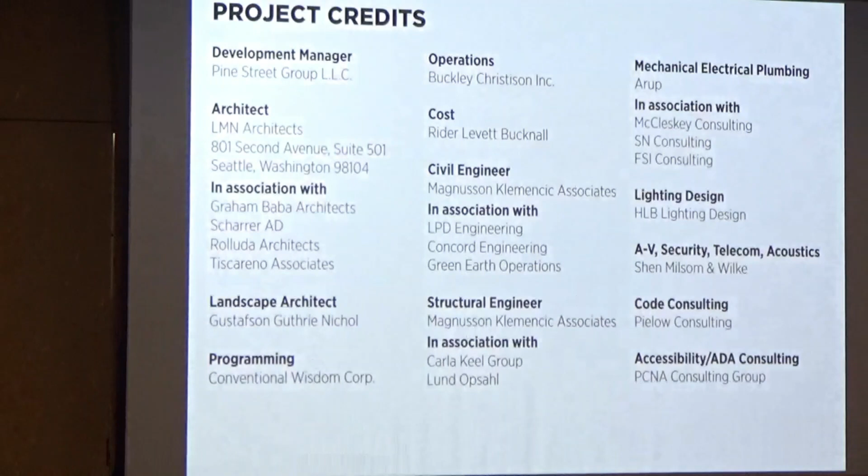So I'm here speaking on behalf of thousands of people and the work that everybody has done. I'm going to just page through without reading every name, but just to remind you that there are so many other really important contributors to the project as we went through this.

One of the things that's been especially exciting about this project is that it has a very ambitious art program. The Convention Center has always had an ambitious art program and an art collection. Part of this project was to establish an art program, and it was funded from various sources.

It was in the range of $8 to $9 million worth of artwork. We engaged approximately 25 different artists. There was a very specific ambition to reach out and engage artists from communities who haven't traditionally been part of this art program. Many of them are young and emerging artists, and more than half of them are women. It's a really diverse, inclusive collection of artists, and the artwork throughout the project, all in public places where people can experience it from the street or from public areas, is still emerging. It's not all installed yet—some of it's there, some of it's in process. But I think the art program itself has been a really exciting part of the project.

The other thing about this project is it's big, it's expansive in its expectations, so we framed our approach like this: this has to be thought of as more, it's not just a building. In fact, we decided it's one of these things. And what that means is it's a holistically integrated, equitable, economic, ecological, civic, urban organism. Every one of those words has an agenda—it has an impact on the way we think about designing and the expectation for what we'll accomplish by making this project with that kind of philosophy.

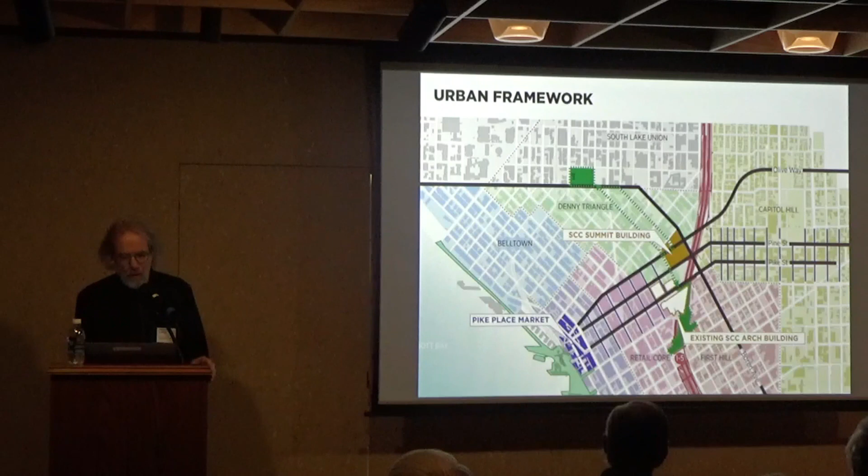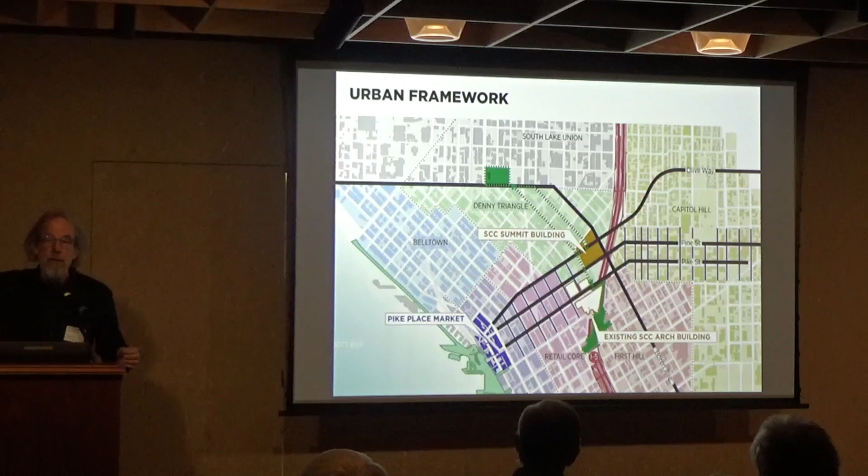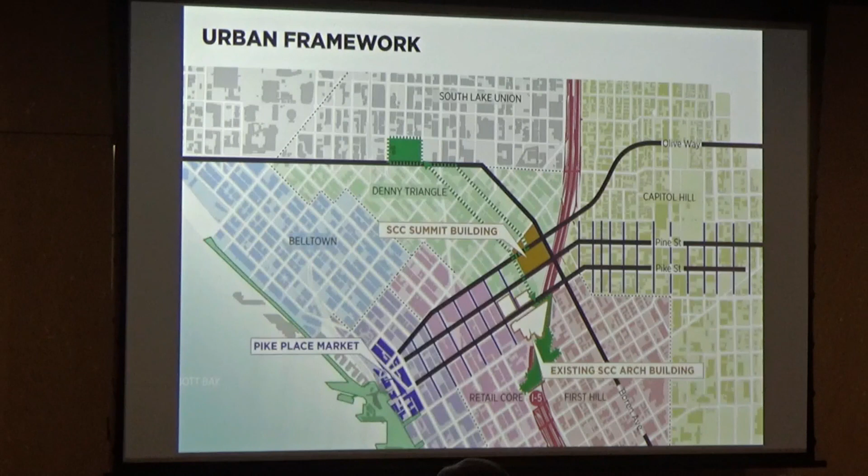It's positioned right in this really interesting place in our city's urban framework—kind of right on the edge between First Hill, Capitol Hill, and all the neighborhoods right in the heart of downtown. Many of them are the fastest growing, most rapidly evolving neighborhoods in the city. This project aspired to being a place that reconnects disconnected conditions in our city. It had historically been an open bus staging site, which was no longer needed when light rail went through the tunnel. Part of this building actually cantilevers over the freeway in order to connect the pedestrian experience on Pine Street, so it's knitting together a lot of different pieces of the city in the heart of the urban plan.

Another part of this project is all of this pink stuff that is not on the same footprint as the building. The project funded about $93 million worth of community benefits, and most of them are off the footprint. Some are on-site open spaces and artwork, but a lot of it reaches out into the community—street improvements, public artwork, affordable housing, the study for the possibilities of a freeway lid, and a number of other things that were part of the project.

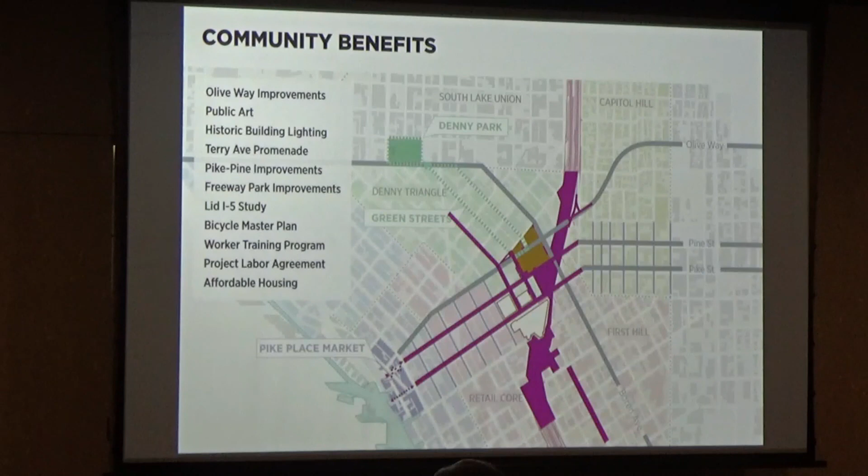So I'm going to show you a series of photos. It's interesting to look at this photo, which was before we started the project. Not only do we now have a convention center there, but we have a whole bunch of towers right there that didn't exist. So it has been built in the heart of a very rapidly changing place in our city.

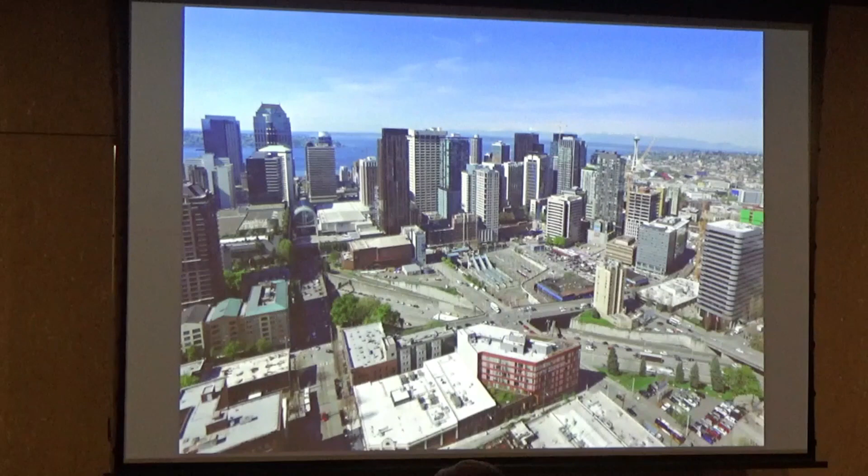But if we start at the lowest level—at the bottom is a very big 150,000 square foot exhibition hall, that's the blue shape you see at the lowest level. Adjacent to that, also underground, is a loading dock, with truck loading bays on the right-hand side, and on the left-hand side, the yellow is the lobby space that connects to that truck loading dock.

Sitting on top of that is the street grid of the city. So Olive Way, which goes all the way through, and Terry Avenue, which ends in Olive Way, are built on top of the loading dock, which is sitting underground.

Another interesting characteristic of this site is that in the foreground of that image is the intersection of Boren Avenue and Pine Street, and at the far corner is the intersection of Howell and 9th Avenue. The site slopes 50 feet between those two points—low at the far side, high up at the corner of Boren—which means the pedestrian sidewalks and the perimeter intersections meet the building floor plates at different levels. That made the puzzle extra complicated but really interesting, giving you a chance to engage the building in different ways around the perimeter.

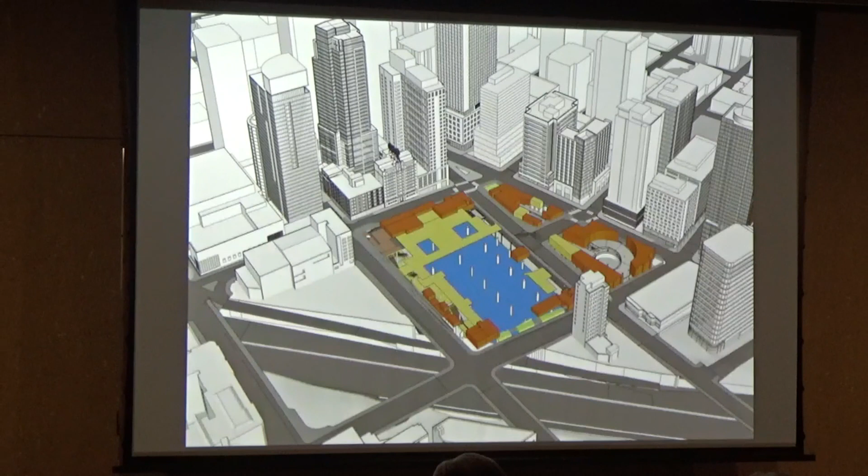At street level, everything you see in orange is retail or some kind of active street front function, like a lobby to some of the other buildings. One of the fundamental ambitions was to create a very active, engaging, vibrant street front condition for pedestrian edges all around the blocks. I'll show you more about that in a minute.

On top of that, or at the same level, is a public market, which is that big yellow shape you see. That's open to the public all the time, regardless of whether you have a ticket to a convention or not. The intention was to welcome people into that space.

During design, we called it the mixing zone - the idea that visitors who may be from out of town coming to a convention, or people who live here and want to be part of the vibe, go to the coffee shops or restaurants, and would all mix and share that experience.

From that space, even if you're not going to a convention, you can look into the atrium and look down into the exhibit hall, or up to the upper levels, and actually see what's going on in the events.

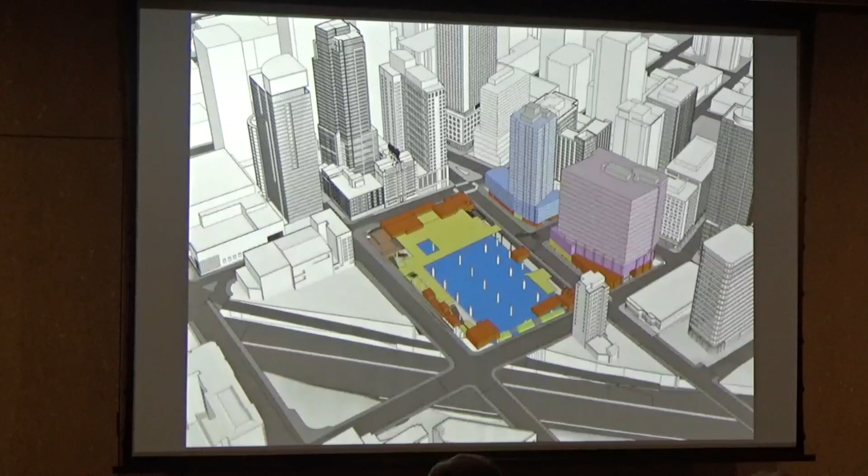Above that are all of these other rooms. So above that, the next blue box you see is called the Flex Hall. That's a 100,000 square foot room with no columns - a clear span room.

It runs all the way from Boren to 9th Avenue - it's two city blocks long. It has a big window at each end, so you look out at 9th Avenue toward the Camlin facade, and on the other side up into Capitol Hill. There are also windows on the other sides looking across to the Paramount or down into the Denny Triangle neighborhood.

The two purple levels are meeting rooms, and the red thing on top is a 58,000 square foot ballroom. 58,000 square feet is the size of a football field, including the end zones - so you could put all of that right inside there.

We're still trying to convince the convention center to let us have a flag football game in there where the design team and the contractors play against each other just for fun. I think we could be faster than they would, but I don't know if we have the same critical mass.

One of the other things you'll find in these purple boxes are shared meeting spaces. They're not all enclosed rooms. One of the things we know from designing convention centers and meeting spaces for people around the country is that people are really tired of going into windowless boxes and sitting in and watching a presentation. They would rather have windows, they would rather feel connected to the outside, to the city.

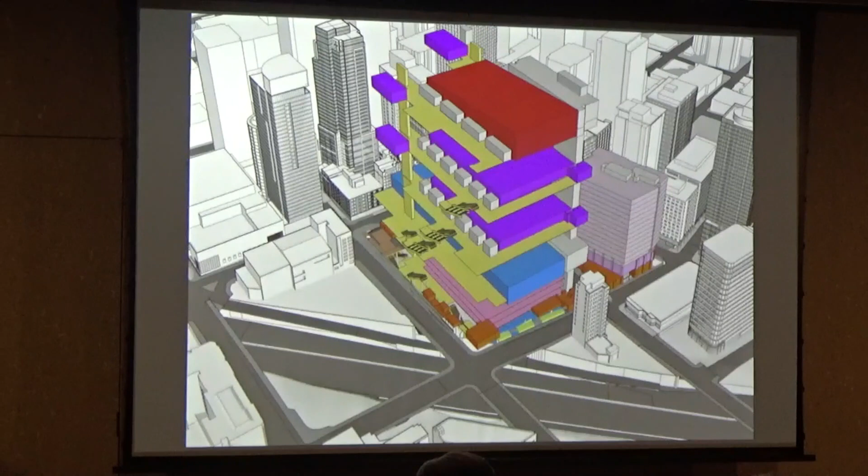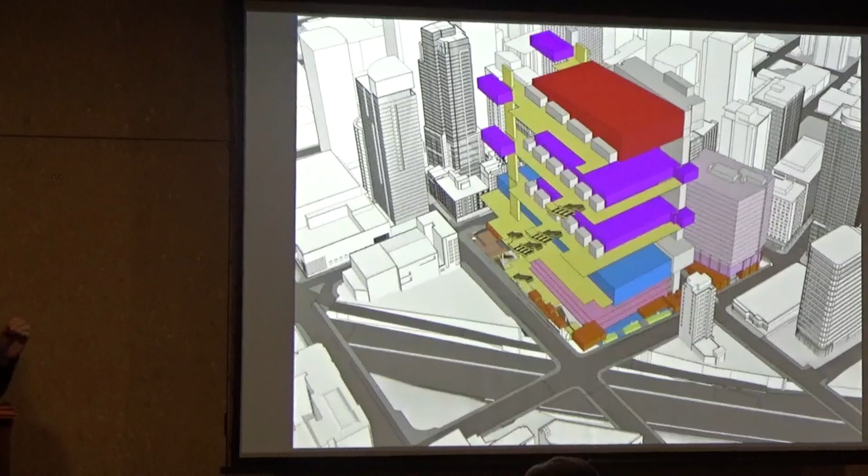In fact, we designed a convention center in Vancouver on the waterfront a few years ago. It has a combination of enclosed meeting rooms and sun spaces - lobbies that go around the edge with windows that look out into the city. They found that a lot of their clients would prefer to book their meetings in the lobby rather than in the meeting room, so they can look out the windows and be part of that experience.

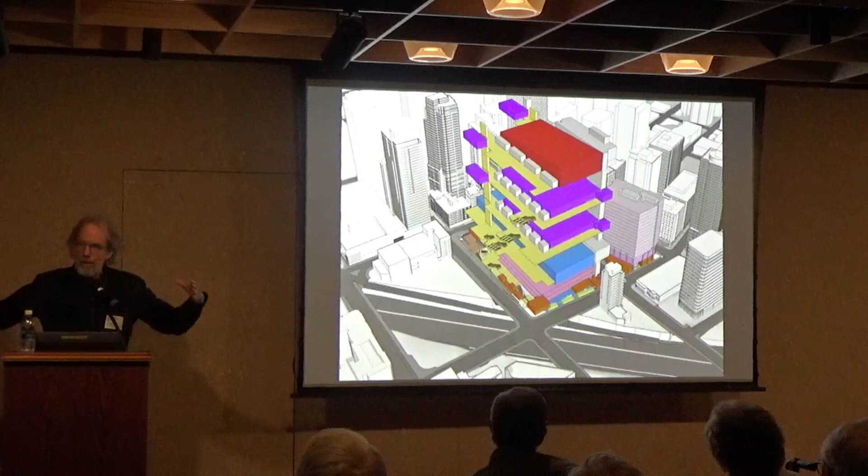So in this case, we actually made every event space, including every meeting room, have access to daylight. There are many meeting spaces that are simply glass enclosed spaces sitting outside the enclosure, adjacent to the lobby. And then if you pack it all together, that's the general building form of the project.

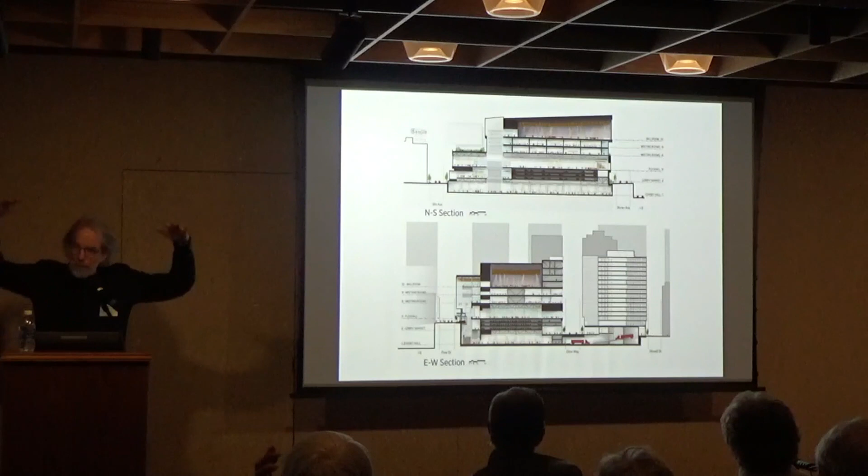In cross-section, you can see what happens when you stack all of that up. Looking at the lower cross-section, the lowest level is the exhibit hall - you see those three skinny floor plates. There's a parking garage built into the heart of the building; you can't see it anywhere from the exterior. But within the dimension of those three floor levels of the parking garage are big steel trusses creating the long span that goes over the exhibit hall below it.

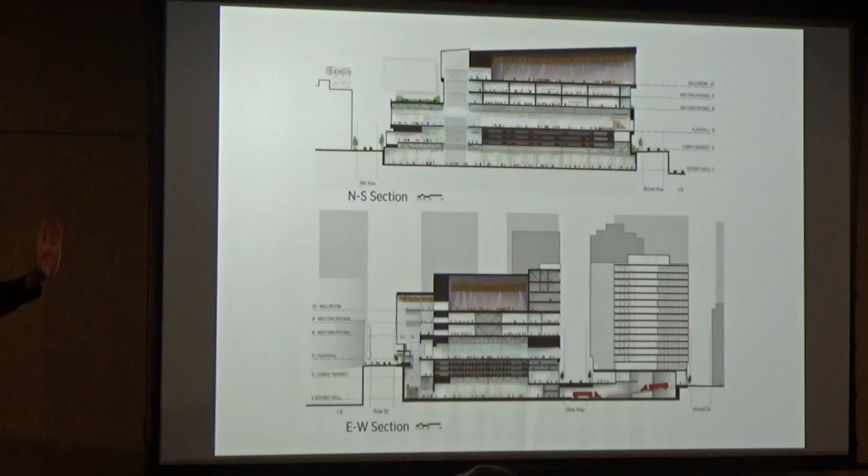On top of that is the Flex Hall with no columns, and on top of that are two stories of meeting rooms. Those also have really tall trusses that span across, which allows us to clear span the Flex Hall and create a really stiff floor in the ballroom.

One of the challenges in a ballroom is when you have a dance party and everybody's moving at the same rhythm, it will vibrate the building. So we have to have a really, really stiff floor. And then the roof, of course, is up high with a long span over the ballroom.

On the left side of that section, we'll come back to this in a minute, but you see how the building sticks out at the upper levels. One of the kind of strange things about this property, which I think is left over from when the I-5 corridor was created and they acquired property and adjusted property lines, is the property lines for this site on the Pine Street site actually go all the way out to the curb. So we were able to build our building over the sidewalk and still be within our property.

And so we did that, and we created that hill climb with the stepped floor that you can see from the facade, and you can be inside that space and look down toward the west, toward the market, toward Elliott Bay, and you're clear of all the other buildings because you're over the sidewalk, which makes an interesting space. And then the drawing above is all the same spaces, just looking at it from the other direction.

One of the things you see there on the far left is a roof terrace, and I'll describe that more in a minute. It's an interesting space at the level where you're at the cornice of the Camlin and the Paramount. So when you're on that terrace, you see all that terrific terracotta detailing at the upper part of the building that you don't really see so much from the sidewalk.

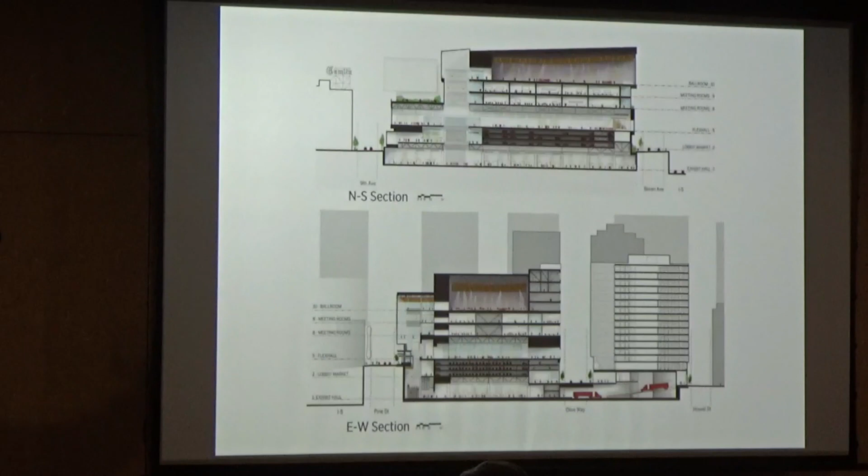Next to that, you can see another atrium. It goes from the top to the bottom. It's over 200 feet high. It brings daylight all the way through the building and connects all the different floor levels visually.

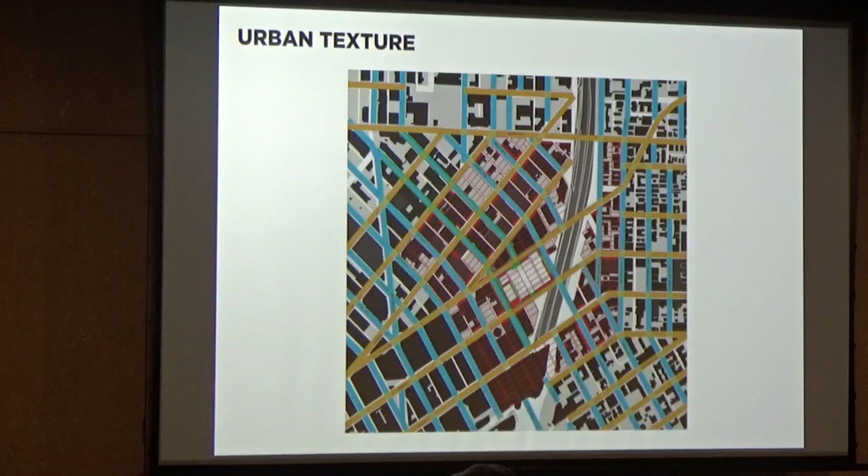What we wanted to test was how could we be a little bit of both. We know we're never going to be as small as one of those, but we wanted to find a way to engage that texture so that when we manipulated the forms of the building, we were aligning it with those modules in the planning, creating subparts to the building that are each at the scale that relates to the surrounding buildings and streets, on the same texture as the historic grid. So that's what all of those colors are, and this is one of the diagrams of the analysis in order to look at it in that format.

We also analyzed the arrangement of similar functions on the streetscapes in the surrounding neighborhood, both in the Denny Triangle and the downtown core, as well as Capitol Hill, to make sure that we were at least as dense, and in most cases more dense, with active street front than the neighborhood was, so that we're not downgrading the quality of the pedestrian experience. We're actually amplifying the high quality aspects of the pedestrian experience.

This building, when you have thousands and thousands of people, also requires a lot of emergency exiting. So woven into this and broken into subparts that are relatively small and easy to absorb in this texture are 240 feet of exit doors.

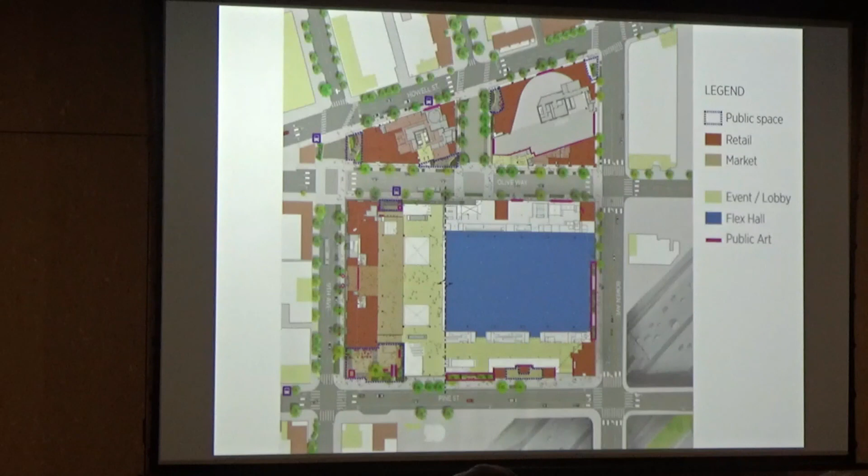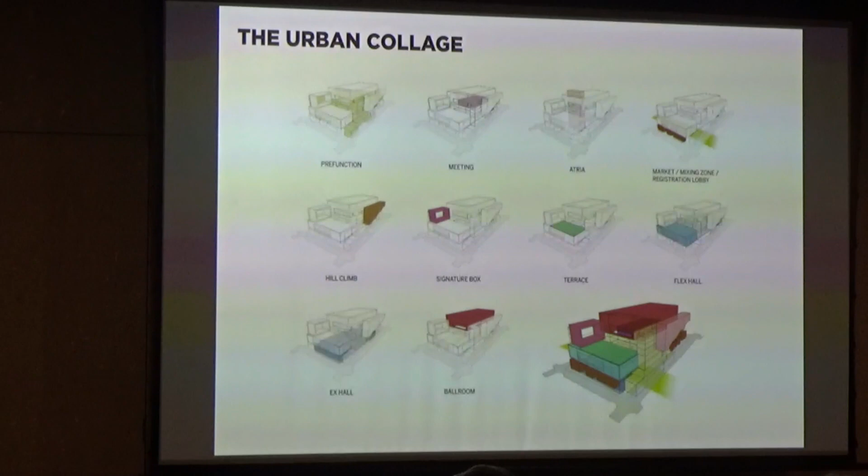The width of that roof garden facing the Paramount is exactly the same width as the Paramount. And the edge of that roof garden on its north edge aligns with the north edge of the Camlin. And so what we have on that roof garden is a space that is framed by the Paramount on one side, the Camlin on one side.

That special box, as we call it, the signature meeting room in the convention center, and then a view into the atrium of the convention center. So the convention center and the nearby buildings are forming an experience that's this kind of collage of what we control and what we're reacting to.

So where all these people are standing will be a series of big community picnic tables in long rows. There'll be smaller seating areas. But what you can see is the experience of being kind of up in the city.

Right across the street is the top part of the Camlin, and you see all of that really interesting detailing, the Camlin sign. This is looking back toward that meeting room. There are 2 stories of meeting rooms in that space. Underneath that meeting room is a covered terrace space, so you can be outside in the rain under that space as part of the garden.

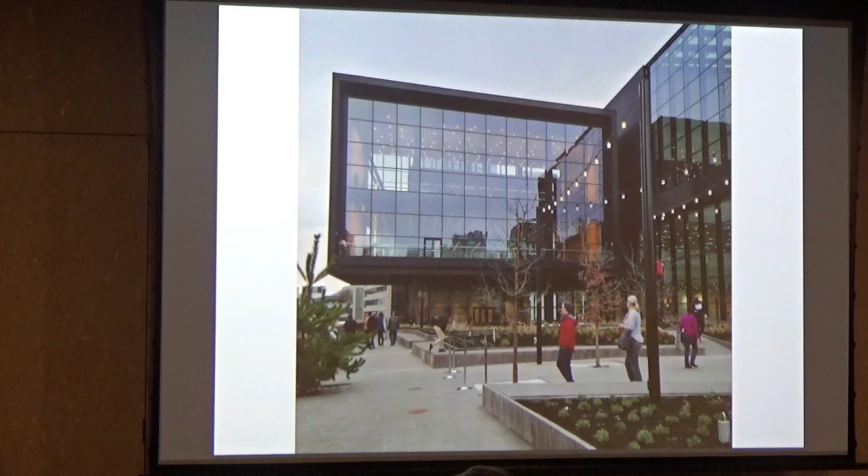And then you can be, of course, the Paramount is right across the street on the other side. So it's a really interesting and unusual way to be in the city and associated with special detailing on the historic buildings around.

The other thing that we worked really hard on in thinking about the design is the context. Obviously the Camlin and the Paramount are really terrific buildings. But the whole downtown and all of Capitol Hill, it's a collection of buildings. And they're all, day and night, interesting in different ways. The light changes. The lights come on at night in the buildings.

One of the things we wanted to do in the design was to, when you're in the building, make it feel as though part of your experience is the city surrounding you, that you're really connected to where you are. On one side obviously the glass side, and then you have the rooms and the events and the activities in the building, but that's the framing of the space. And we wanted to use that contextual setting very directly.

I'm going to show you along the way here some images like this, which is an illustration that we created during design to describe what the building was going to look like. And then I also have some photographs that were taken since it's been finished.

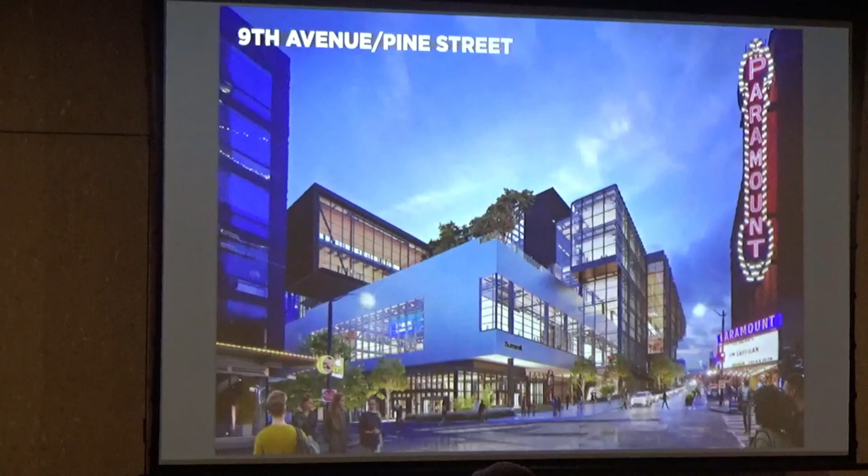We don't have any super professional photos yet, so these are just what we were able to collect, but it does give you a sense from approximately that same view.

This is a photograph showing the reverse of what I just described, that we also wanted the building to reveal its activities to the street. The treatment of the different facade elements has a lot of glass, a lot of ways to see into the building in different ways, a lot of ways to see the materials happening inside, so it becomes an active part of the streetscape environment by presenting its activities to the street.

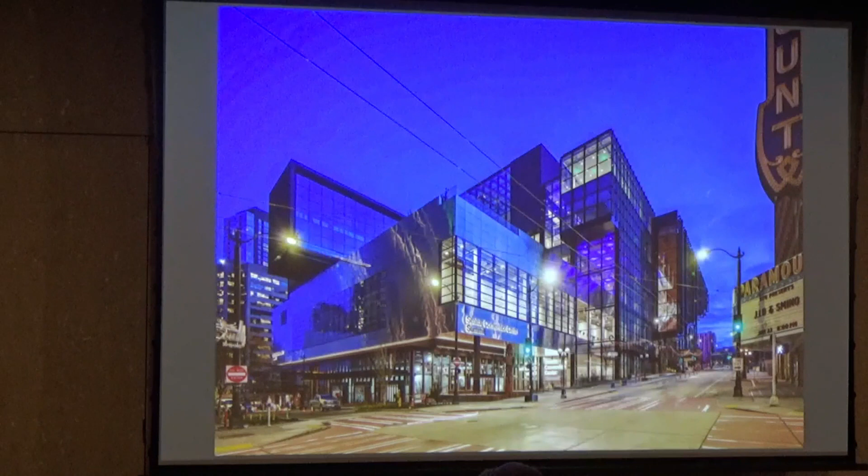And the material, if you see the sign that says Seattle Convention Center Summit, the wall there is kind of shimmery. That's a brushed stainless steel panel, the only material that goes the entire length of the building, wrapping that flex hall space I was describing. That material goes into the building and out and around the other side, and it has this really interesting shimmery effect where it picks up light and the quality and color of light, but it's not a mirror, just a sort of soft reflection. So it changes a lot and is really a dynamic part of the facade expression.

That's polished stainless steel, and the idea is that because it's faceted, it's picking up reflections from all kinds of different angles anytime you look at it. When you're looking at it from an angle like this, you're actually seeing reflections of fragments of what's going on inside the building.

When you look at it from different angles, you're seeing reflections of those little roofs sitting below it. Each one of those is a small retail space - there'll be a coffee shop, I think there's a beer place going in one of them. Each one has an artist associated with it, and the artist designed a panel that's on the wall you see from the street, wraps underneath which you see from underneath when you're in the building, and wraps on the roof, which you see in that mirror from different angles, or you can look down on it from inside. So that mirror and the artwork becomes a composition you experience in a lot of different ways.

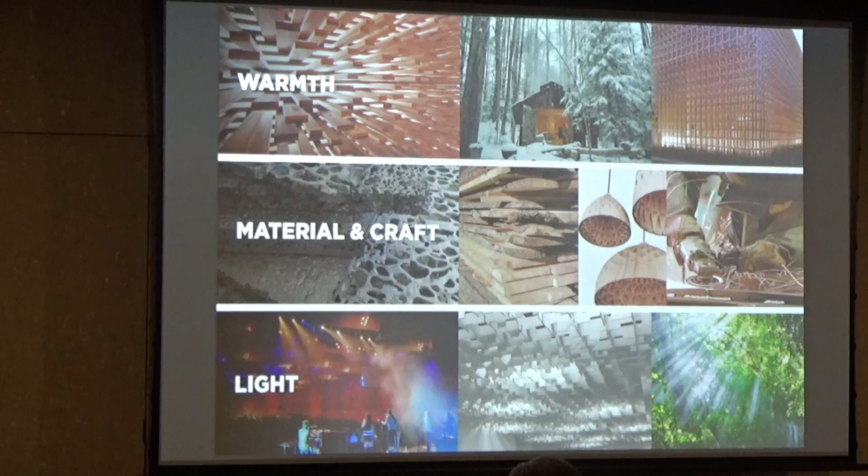And then, of course, we recognize that the dynamic daylight here is stunning, and we wanted to allow this experience and design of what we're creating inside the building to engage what it means to be in Seattle daylight. A sense of material and craft and the quality of light were all part of how we thought about the interior design.

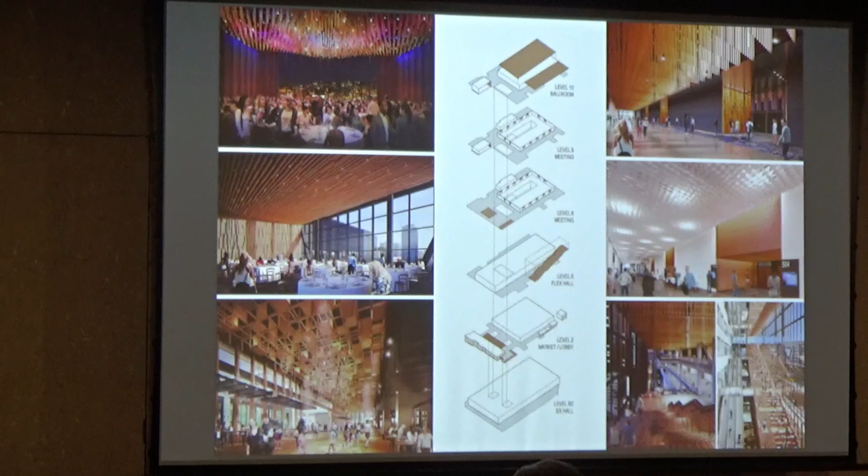Starting with the hill climb space when you're inside it - you're over the sidewalk, looking west in this view, and there's that tall, slender window.

Because that window view is so important, both from the inside looking out and from the outside looking in, we treated that glass in a special way. That glass, which is insulated glass, has two pieces, four surfaces, and every one of those surfaces has an anti-reflective coating like you would get on your glasses.

So that you can be in here at night - and unlike most windows, where at night you see the interior lights reflected and it's hard to see out, in this case you can see right out, the glass just kind of disappears. Likewise during the day, you can be outside on Pine Street and look right into that window, and unlike most glass, you don't get a glaring reflection of the exterior.

What you see overhead is a series of boards, actually made out of a panel, a fir panel, cut into what we call combs - a series of boards shaped like this. We took the panels and cut them apart and turned them into that, and there are like 6,000 teeth of those combs, arranged to capture this filtered light effect.

So during the day, the sunlight will come through it. At night, there's light that will shine through, and you get different layers of light through that wood. This is what it's like during the day.

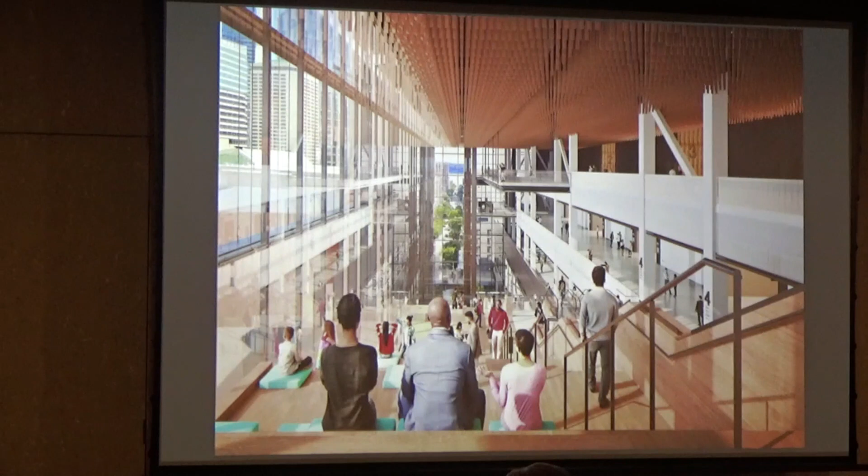This is a photograph that was taken when it was opened recently at the open house, I guess it was last Friday or the Friday before that, or fairly recently anyhow.

So you can see the effect of that window, the seating steps, the dynamic of the different levels, and the way it pulls in the elements and becomes this composition of inside and outside.

The day we had the open house there were opening events all week, but that one was by far the best, because that was where everybody in the city was invited to come in, walk around, explore the building, and there were thousands of people who showed up. It was really fun to see all the different ways people found to experience the building.

As it gets dark, it gets really dramatic in a different way, where the lights start to come on outside. You get this collection of reflections and transparency and different colors and spaces.

A friend of mine was there with, I think, his kids are about that big. They would go on these seat steps and jump, like three of them down, and fly through the air. They sent me some pictures of that, which was pretty cool.

So there are stairs there that are wood clad, and then there are seat steps that are the size of a bench, with the idea that people will just go there and hang out. You could actually seat about 350 people on that if every seat were occupied.

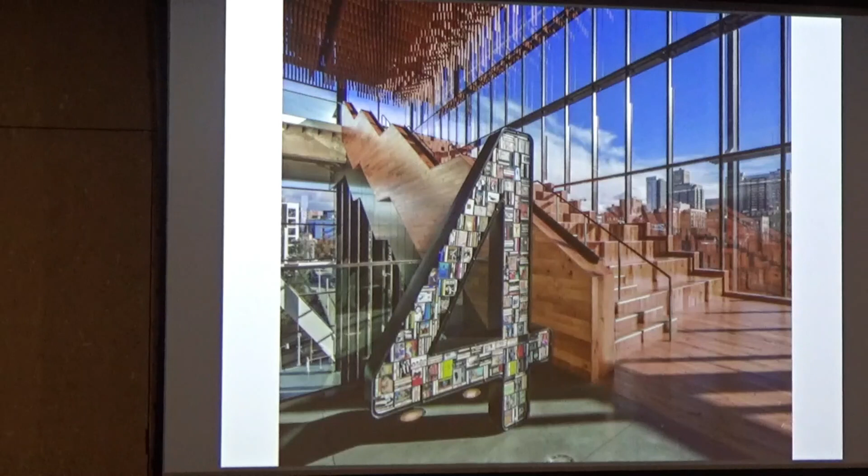In many places, like this view, you get this terrific view of the Paramount sign. That kind of shows up many times from different vantage points, different places in the building.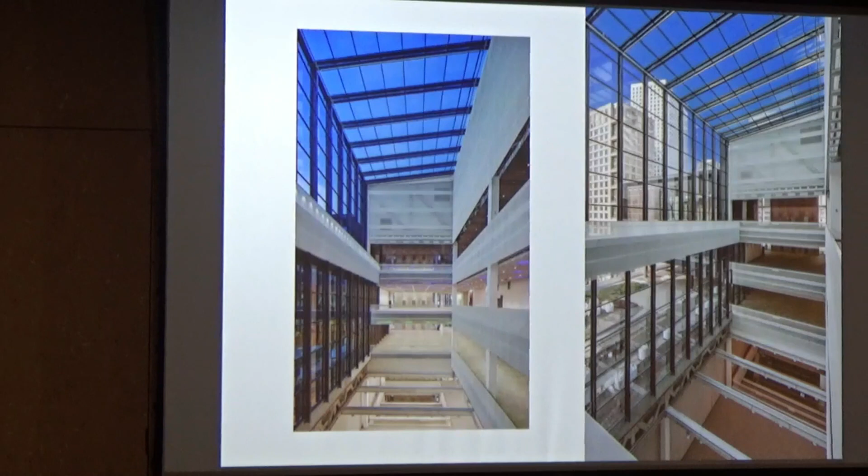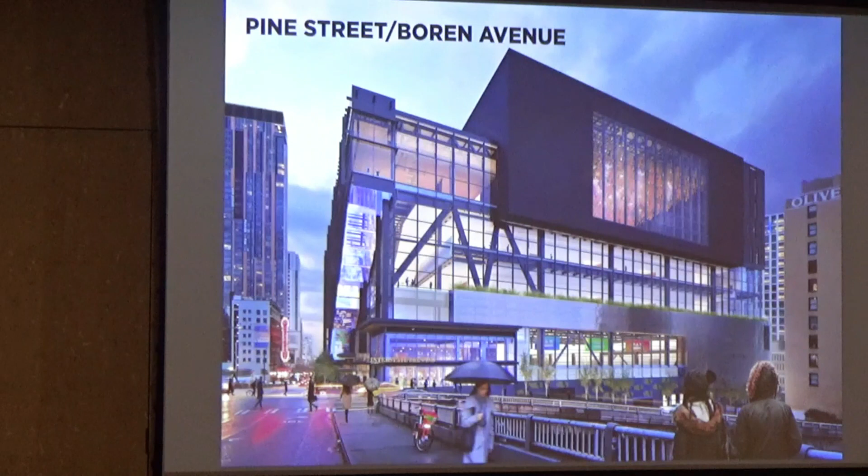This is one of our renderings, our illustrations, and here, if you look at the underside of that mirror, you can start to see the different artworks that are illustrated in that mirrored soffit.

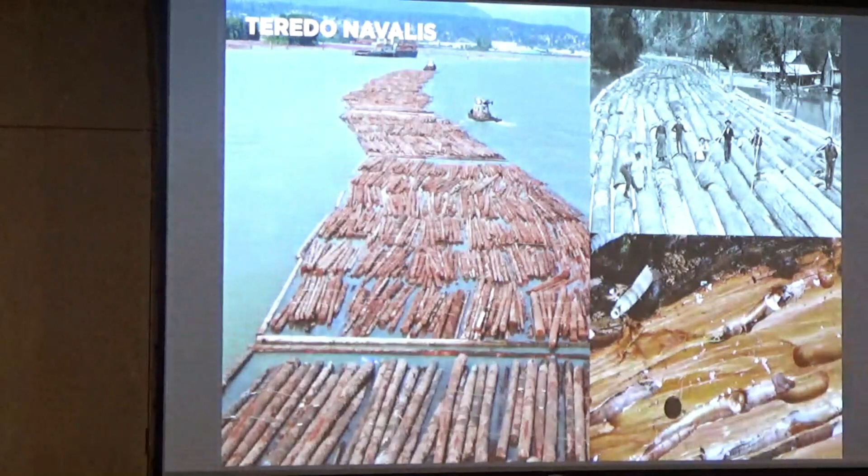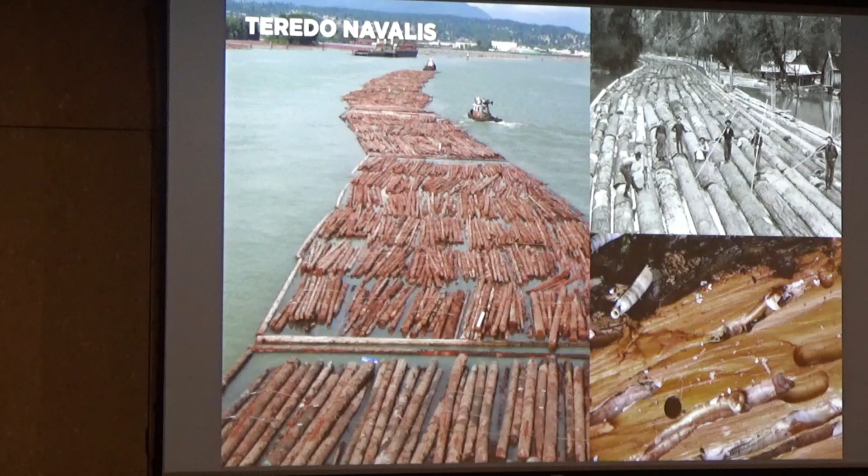We were interested in continuing to capture dramatic qualities of light that you might experience in forests, and also in other timber industry references in our design. These are log booms, and the way logs are moved through the water. Little creatures go into the log booms and chew their way through, and eventually the logs get so waterlogged that they don't float well enough and have to be replaced. So when they pull them out and repurpose them, we use those to make these boards.

Each of those boards is 8 feet long. They range from 14 inches to 18 inches wide, and since the logs are all different sizes, we just said anything in that range is okay. We mounted them at different angles so they would catch the light in different ways. They're spaced wide enough so that a lift for servicing can reach up between the boards to get to all the equipment above.

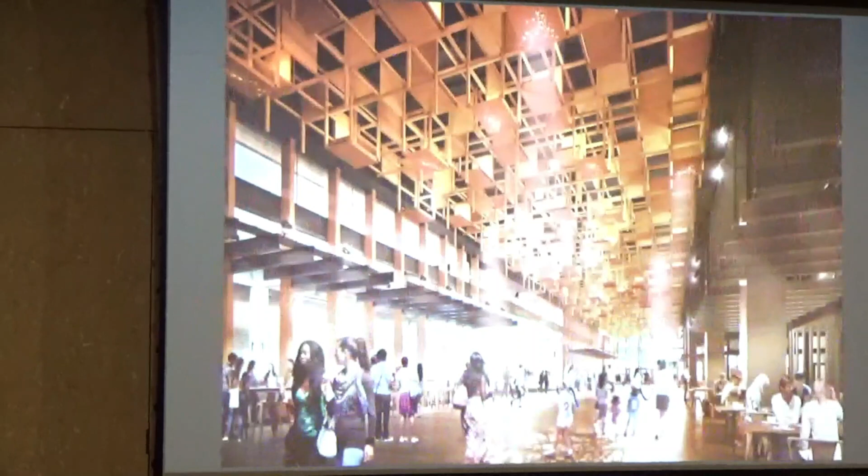Going back down to the street level, the mixing zone or public market space, shown here in an illustration during design. You're looking south in this view. Across the street would be the Paramount. There's an entrance at that corner near the Paramount, and another entrance on Olive Way, so you can come in from either side and go all the way through this space.

On the left-hand side of this view, those vertical wood members are the repurposed timbers from the buildings that were on the site before we did this building. Beyond those wood timbers is the atrium, where you can look up and down and get daylight from the sky and see what's going on in the rest of the convention center. That's also where the registration hall is, where people coming to events register and then go on to their various places in the building.

On the right-hand side of this view will be a series of restaurants. There's one that's nearly completed there - it's the Ethan Stowell restaurant that will be in that space. There are other spaces for other restaurants and/or tenants, and they're still working on filling all of those spaces. There's also a space in the middle that's open - a flexible space. That might be a space where the restaurants would spill out at certain times, or where they'd have a catered event. It's also intended to be a space where other kinds of things might happen, like an art show from a community group, or yoga classes or other things. It's an active part of the mixing zone and the shared community experience.

I'm going to show you just a couple of other shots moving around the building from the perimeter. This again is at the Paramount corner. This is at the corner of Olive Way and 9th Avenue. The other entrance I was describing is right there, so that mixing zone goes all the way through. One entrance is here. What you ought to see to the left of that are the brackets and those wood boxes hanging on the side of the building - those are hanging gardens, with plants in there.

They're hard to see because they don't have any leaves right now, but they're a collection of ferns and small maple trees and other local indigenous forest plantings. That collection of hanging gardens aligns with the dead end of Terry Avenue, which is a green street that also has enhanced landscape on the street all the way down for several blocks. So that sort of terminates Terry Avenue.

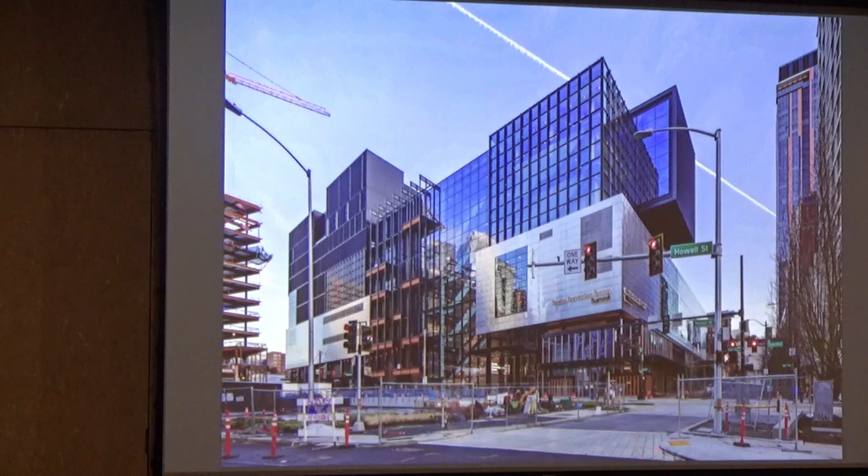Their structural core will come down in the middle of the loading dock. The ramp to get trucks down to the loading dock will spiral around that structural core, and then trucks will come back up and drive back out. So there's a whole integrated collection of commercial towers, truck service areas, lobbies, gardens, and a loading dock there on that side of Olive Way as part of the project as well.

So that's a summary story about the project and the parts that are included. I think we should have something nicer on the screen.

But I think we can answer questions in whatever format. I think there are microphone runners.

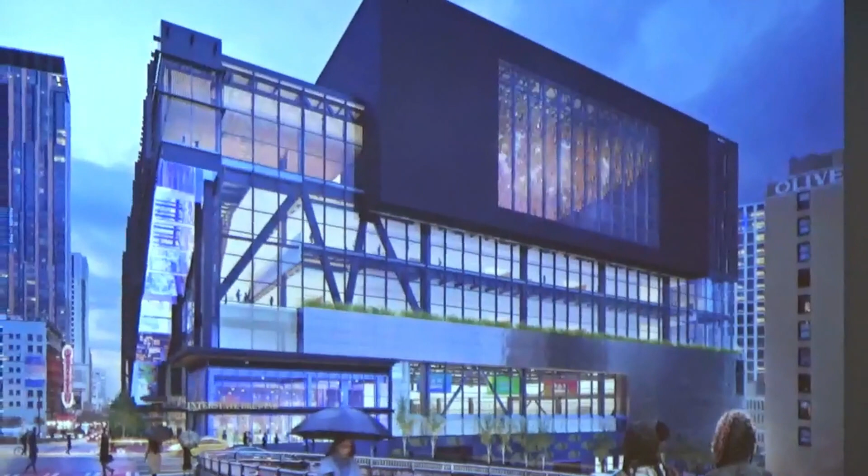It's a little. Do we have one? You can sort of see it here. So the carpet in the ballroom is a custom design, and we designed that by starting with a photograph of a forest floor, which has a whole bunch of different colors and leaves and swirling shapes. We digitized that photograph, enlarged it really, really big, and then started manipulating the colors and the composition so that it would create this big effect in the room.

The repeat is 90 feet. So unlike most carpets where it will repeat every 18 inches or something like that, this is 90 feet by 90 feet. So when you're in the ballroom, you cannot see the repeat at all. It doesn't look like a pattern, it sort of looks like you're in a garden. It also disguises almost anything you could spill on it, which will be handy. If they're actually going to have an event where you're really dancing, they'll have a portable dance floor that they can put on top of it.

I think she was first, if that matters. So I'm wondering if this building connects to the previous convention center, and what the connection between them is, and is it going to make the old buildings redundant, or what happens with the previous convention centers?